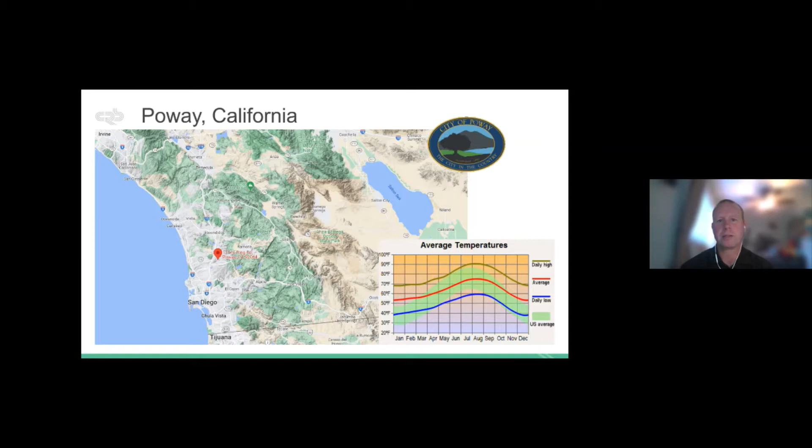So where is Poway? Again, it's a suburb of San Diego. I'm about 20 minutes to the coast. I'm about 25 minutes from downtown San Diego. We do get some cold nights, so no snow or anything, but we do get down into freezing temps, and then we routinely get into triple digits during the summertime. So I offer that just as maybe a benchmark. So when I'm showing you some of my data, family of 5, living a little bit further inland, so it is temperate, but we do get some hot summers and some cool winters.

So last year, I had the opportunity to present Allogene Therapeutics. They were an ATMP manufacturing facility, and they wanted to prioritize 3 items as part of that design, and that was adaptability, collaboration, and sustainability. And for them, sustainability was inclusive of a zero carbon design. So as part of that Allogene effort, we went ahead and developed this 4-step process. And I've applied this 4-step process to many other facilities as well as my own home. And so I'm going to take you through those 4 steps and what I was able to do here at my home level. So step 1 was applying that best design and construction practice.

So anybody that's purchased a home knows that there's a binder filled with just a lot of information. And as the broker is going through flipping pages, do you understand this? Do you understand this? They flipped over one that said energy efficiency mortgage, which caught my attention. Asked a little bit more about it. The broker said, oh, no one takes advantage of this. I said, well, it's something that I think I might want to. So let me know a little bit more about this.

Put on by the Housing and Urban Development, or HUD, where they can finance 5% of the home purchase price or $8,000, whichever is less, to give you money through your escrow account for doing energy efficiency upgrades. And that $8,000 maybe translates to $50 mortgage, and there's no pre-approvals needed because the thought process is that additional mortgage that you'd be paying is roughly equivalent to the energy savings. So the first step on part of this program is to acquire a HERS, a home energy rating system, effectively an energy audit, where they tell you where to put your money.

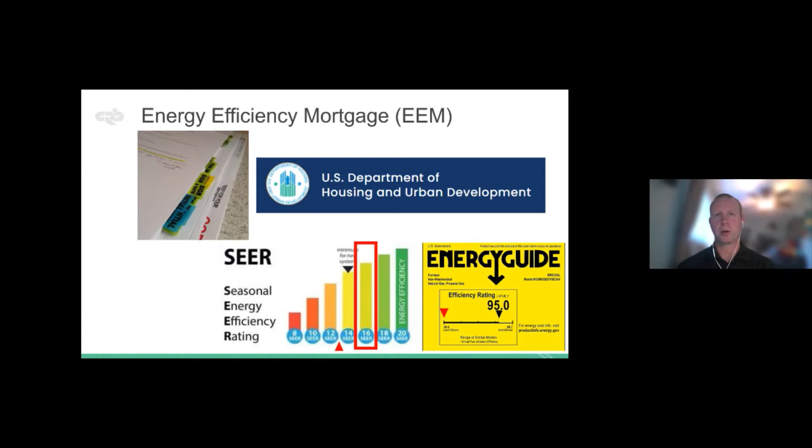What I was also able to do as part of that same program was enhance the envelope. So I replaced all of my windows with dual pane, low E, argon filled glass. So not only does it have the thermal properties, but it also has the acoustics. So being able to drown out some of the noise from the backyard, or some of the jets that fly overhead, because I am in proximity to the previous Top Gun facility.

And then also, my house was built in 1972. It's 50 years old. There was no sidewall insulation, so we went ahead and updated all the insulation in the walls with loose cellulose, and then blown insulation in the attic as well, so equivalent of R13, R19 respectively.

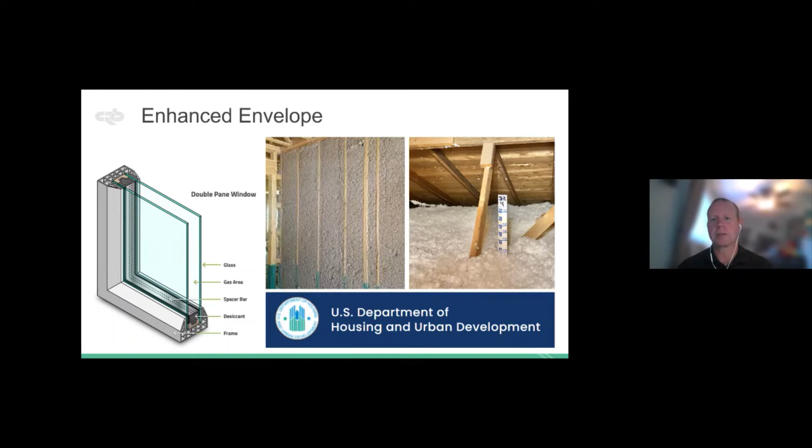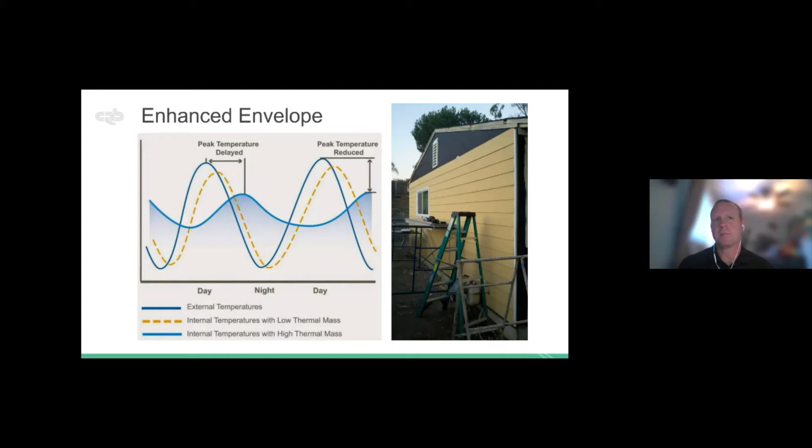The other first upgrade that I did to the house was I rewrapped the entire skin in Hardie plank siding, so it's a cementitious material. And what this cement or even stucco type product allows you to do is add additional thermal mass, which might not be a great insulator, but is a great capacitor. So it smooths out some of the peaks and valleys. So while the temperature outside might peak at 1 o'clock in the afternoon, my house doesn't see that highest temperature until maybe 4 or 5 o'clock in the evening.

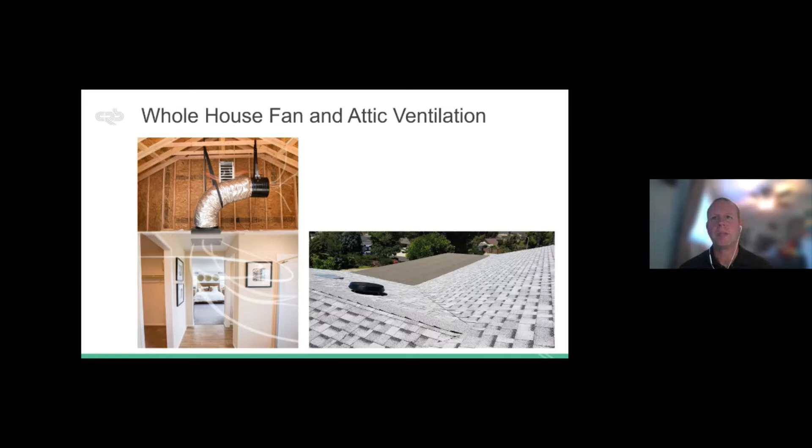What I was also able to do on my lighting, as part of my roofing project that I did over COVID, was install some Solatubes. So I put one in each restroom that are in the core. They don't have proximity to the exterior windows. And then also in the hallway. And I get enough light that I rarely turn on the lights in either the hallway or the restroom. And even during the middle of the night, I actually get enough moonlight that comes through that I can walk freely to get a drink of water in the middle of the night.

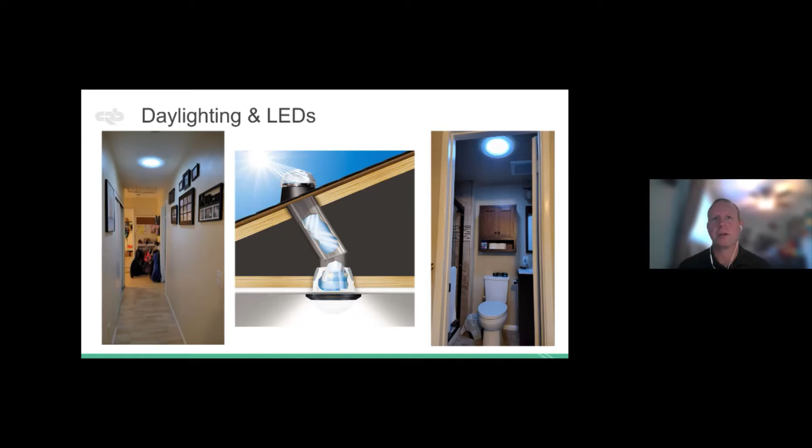Since we've been in lockdown for a while, I think everyone had a COVID project. My COVID project was this front porch. So as part of that roofing project, I extended the front porch out and got some additional shade on that southern exposure. I went ahead and put in some ceiling fans so I could use that during the summertime heat. I also put in an electric radiant heater so I could use that in the cool mornings. And it's really just put a lot of shade onto the exterior of the skin.

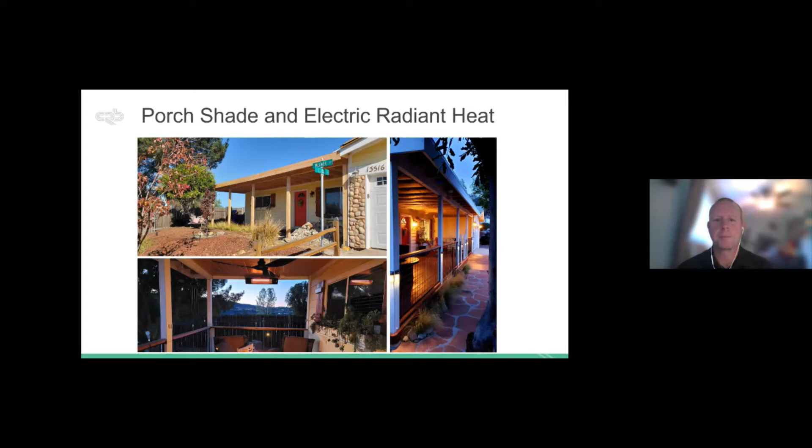And not only does that save 100,000 gallons of water a year, which translates to nearly $1,000 that would be coming out of my pocket, but it also translates to the additional cost of maintaining grass, the mowing, the trimming, the edging, the fertilizing, and probably most importantly to me is the time commitment. We're a pretty active family, and committing every Saturday morning to mowing the lawn is something that I wasn't excited about doing. So this has been a great way for us to spend more time with the family.

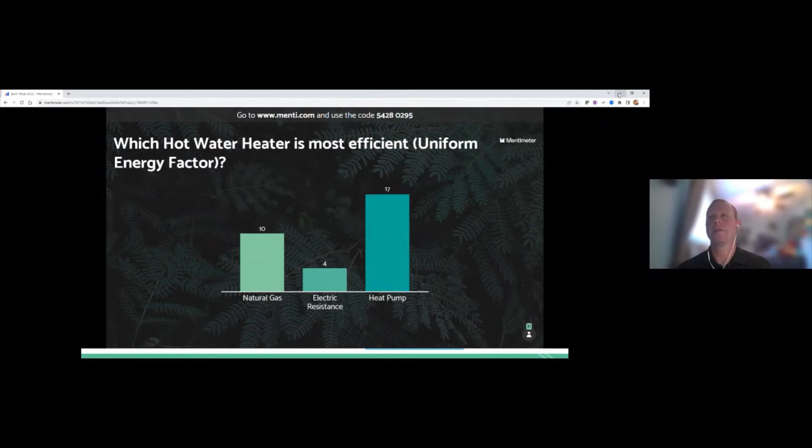But as those continue to populate, you can see that there's a lot of heat pumps, there's quite a few natural gas, and then electric resistance rounding out the last. So I'm going to flip back over. There's still a couple more natural gas that are edging their way up. All right, so let me flip back over and show the results.

So according to the uniform energy factor as published by the manufacturer, you can see that a heat pump has a tremendous energy advantage, almost to the magnitude of 4 times the efficiency of electric resistance and 6 times the efficiency of natural gas. It's incredibly more efficient. There are some drawbacks. It's a low grade heat, so it takes a lot of time. So you're relying on all of your storage capacity in order to maintain that heat.

I had an emergency where I discovered that I had a leak in my water heater, but I luckily had a plan in place and already had a water heater picked out. So this is my water heater on the left. It's a heat pump water heater. It's effectively a small air conditioner that sits on the top, and it rejects cold air to the house and then puts the heat into the water.

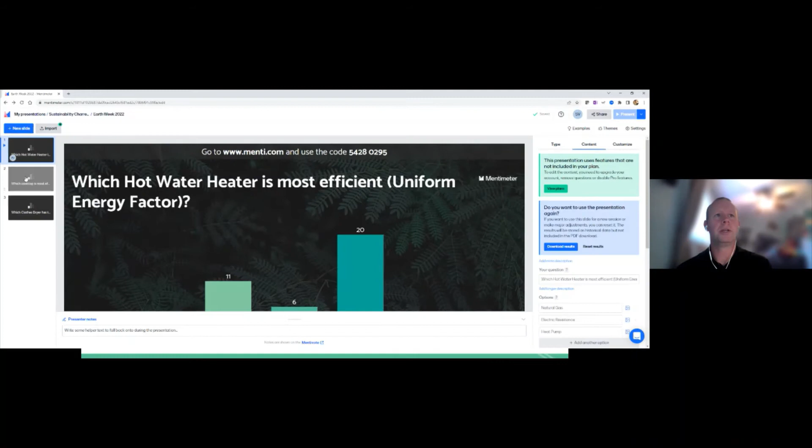So during the summertime, if you want to know the coldest place in my house, go into the laundry room adjacent to this water heater and just stand in front of that nice fan, and you'll have nice 50-degree air being blown on you. So that's going to bring us to the next question, and I'm going to flip back over and see if I can get this to work. But this question is going to be with respect towards which cooktop is most efficient? Which is fastest to boil a cup or a pot of water? Natural gas, electric resistance, or induction?

And so I'm trying to do this on my own phone to see that it's working. And it does look like some comments are coming through. But yeah, if you do log into menti.com, use the code 54280295, you can see some of the results start to populate. So it looks like it is working properly.

So I'll tell you, this was one of the more difficult selling features at my house. My wife is a prideful cook. She doesn't like people messing with her equipment. She knows that I was on my electrification quest, so there was a lot of hesitation, and I will flip over back to the slide. So it looks like there's an overwhelming opinion of induction. So let's flip back over.

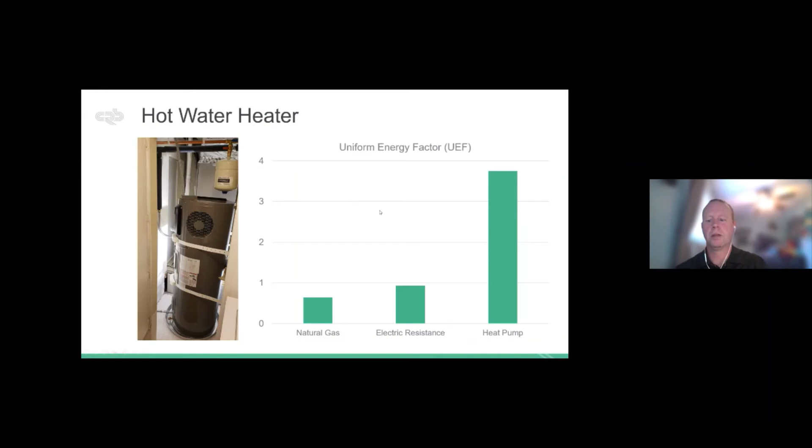This is actually my stove on the left-hand side. It includes an air fryer. So I said, hey, Amy, give me your honest opinion. It's been 2 months. What do you think? And her feedback was, I love it. So really the only challenge is that you need to make sure that you have metal clad cookware, because it is running off magnets. But from an efficiency standpoint, induction is by far the superior one there.

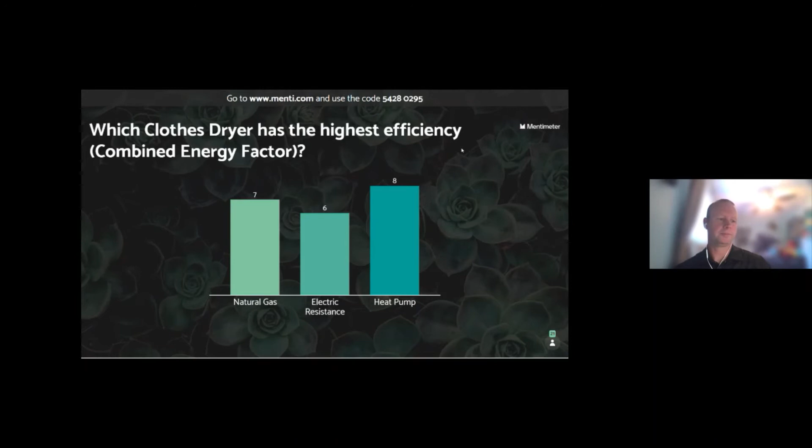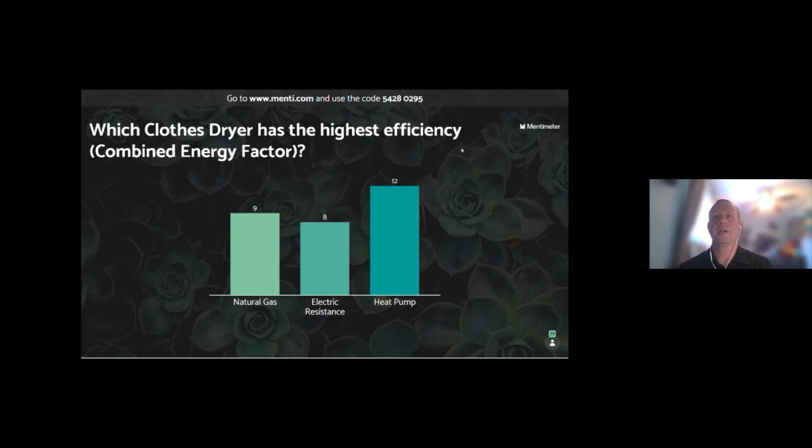So this is going to be my last question, and it's going to be which clothes dryer. So let me flip back over. And the question is, which clothes dryer technology is the highest efficiency according to its combined energy factor? Natural gas, electric resistance, or heat pump? This one's a little bit more evenly spread. I'll give that just a few more seconds to populate. But it looks like it's pretty evenly balanced there. And maybe because people know that it's not a trick question, but there's a little bit more difference of opinion on this one.

So the vertical axis is the efficiency, and you can see that there are a lot of heat pumps that are most efficient, that they are higher on the efficiency curve on the vertical axis, while there are some that are below the gas dryer. But what you'll also notice is because heat pumps are notoriously low-grade heat, the cycle times are much, much longer. Now, that's not always necessarily a bad thing because it is more gentle on the clothing, but most people want to get their drying done within 60 minutes time or so.

So the other drawbacks with heat pumps is that they do have a little bit more maintenance. There's condensate that comes off of that, so you need to figure out a way to drain it or to pump it out. And there's also multiple coils. There's effectively a hot coil and a cold coil that needs to be maintained every so often. So I opted not to go the heat pump route because I did not want this electrification quest to backfire on me. So I took the efficiency penalty and went with an electric resistance dryer, and we're going to see some of the results of that coming up.

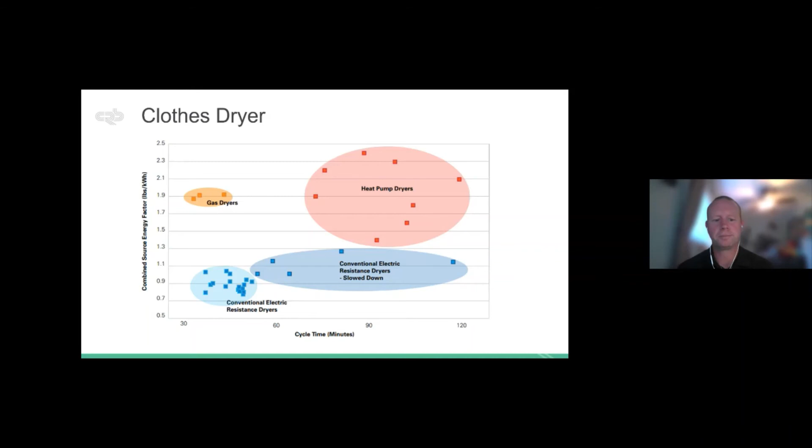So electrification, what has that effectively done for me? Well, it's lowered my gas usage, and that's no surprise. So you can see as I've started to convert these different appliances, my gas is trending down towards zero. So those last 4 or 5 years, and you can see that it peaks in the wintertime, of course, when we're heating up the house, and then it settles down when we're still operating those base loads.

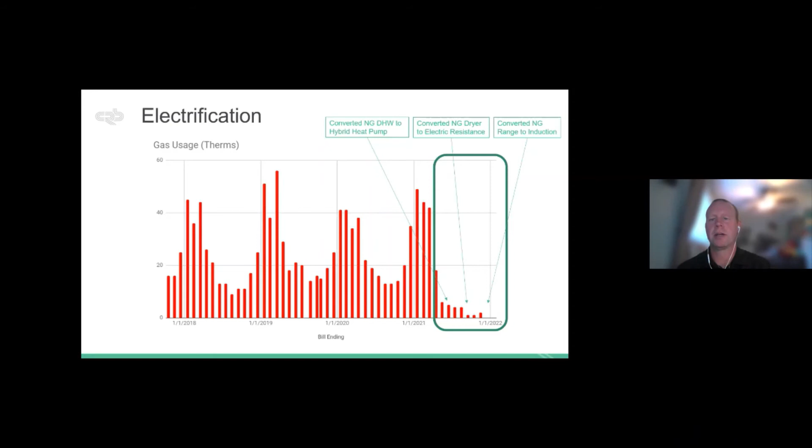So let's move on to step 3, resiliency and self-reliancy. Provide on-site renewable power with time of use energy storage strategies. The on-site renewable is pretty straightforward. The time of use energy strategies is where I think there's a lot of conversations that we can have going forward. This is my solar system. It's an 8 kW. I had the luxury of knowing what my base load was, looking at my last bills, and then estimating what I was going to be growing into.

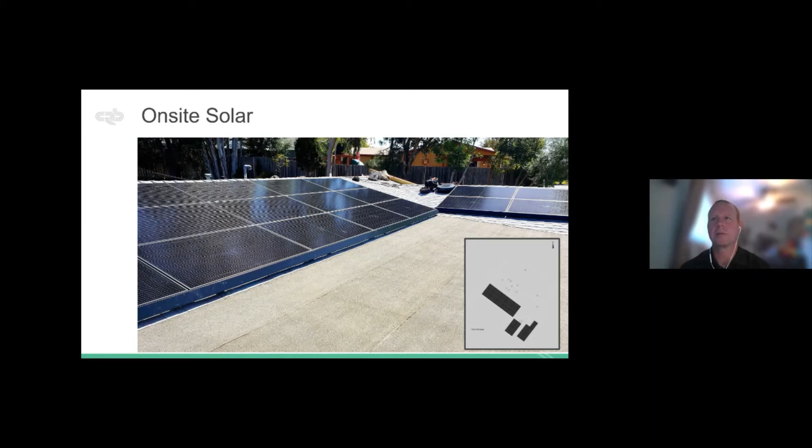So here's my 8 kW system. It produces about 12,000 kWh annually. If you do some simple math, that's about 1,600 kWh per kW. It's 24 panels, 340 watts. It's a Tesla array. And so far it's been great. It's performed well, and you can see when I flipped the switch, I was backfeeding the grid as a net average for those first couple months.

And then as we moved into winter, you can see that I was getting much less production. To the amount, about 50% of my peak is my winter time. So moving into winter, there's less production, and therefore it starts to go back positive. How does that translate to cost? Well, pretty good. So you can see my bill for the end of 2021 was effectively zero once that solar was installed. Not to mention that's including electrifying 3 out of 4 appliances.

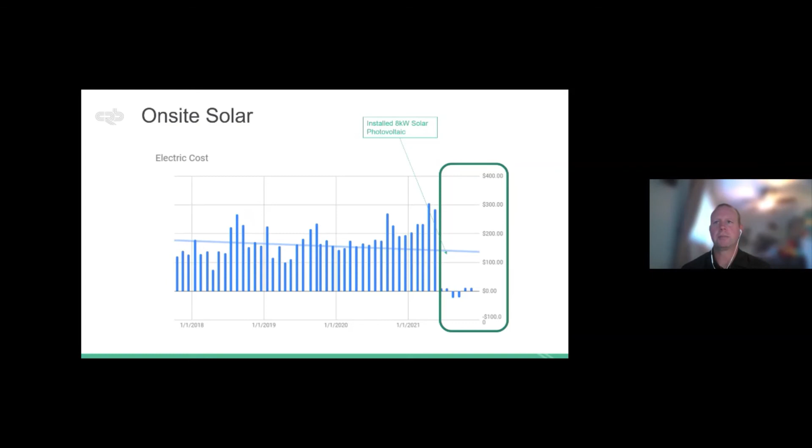So that's a pretty great thing. When we talk about on-site storage, that's where I did not opt to go into getting a battery. It's about a $10,000 add, and the return on investment for me was just a little too long. And I was hopeful that in the future I might have a truck.

And I know that was asked about in yesterday's presentation as far as whether or not we're considering. And right now, there's still a lot of supply chain issues with a lot of the EV truck market. So I'm pretty hopeful that that will get worked out over the next 2 years. And then, of course, the infrastructure is improving daily.

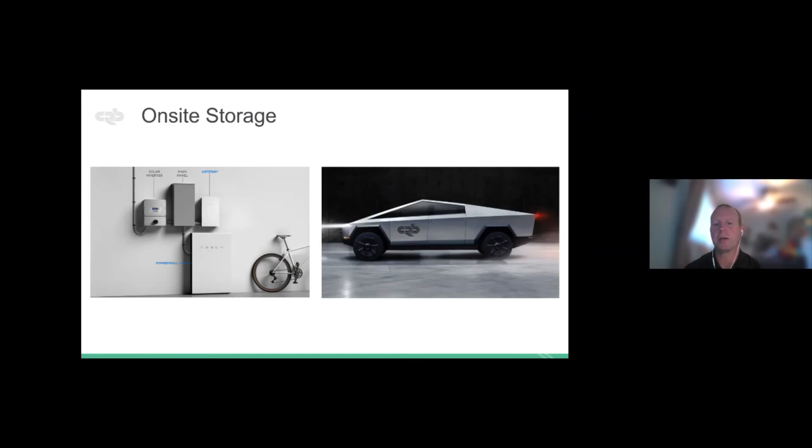So I'm looking forward to having my vehicle that would hopefully have that bidirectional flow of electricity, both V2G, vehicle to grid, and vehicle to load, V2L. So I can charge it when I'm overproducing, and then I can discharge the battery when I need to.

Other strategies that you can do for time of use energy. So on the lower left, you're going to see that the utilities are smart. They know that their profits are being challenged with on-site renewables. So they've started to put peak pricing from the hours of 4 to 9 p.m. when the demand stays high and the supply drops off when the solar goes down.

So some things that you can do, I already mentioned the cementitious siding. So again, that was kind of just creating more thermal mass as part of the house. But you can also pre-cool your house. So run the air conditioning from 2 to 4 p.m. and then close up all the windows and try to drift through that evening time period. You can apply these same practices to some of our facility design by making the chilled water temperature colder as an example.

Same thing with my hot water heater. On the far right, you can see my schedule at 12 o'clock. I crank that hot water heater up to 131 degrees. So that gives me a little bit extra capacity that I can try to ride out through the evening period. And you can see in that example there that I was able to avoid the use of the water heater from the hours of 4 to 9.

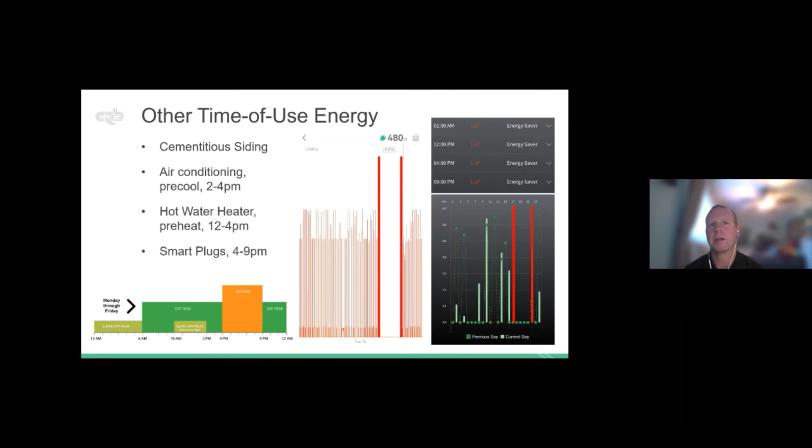You can also use smart plugs, which the center graphic shows the beer fridge that I have. And again, from 4 to 9, it's 0 because I've programmed the smart plug to turn off during that time frame.

And so this last step is consume 100% renewable grid electricity. I think this is the tried and true argument that just because you electrify does not make it clean necessarily. So if you are connected to a coal-based power plant, that is bad. That is not clean electricity.

So as the utilities have discovered that it's taking more and more money to maintain these old fossil-based power plants, they're getting out of the generation business and leaving that to private sector. And so as private sector is putting more and more renewables online to comply with the state requirements, the customers now have a choice of where they want to buy their generation from. They're still going to use the wires and transmission and billing mechanism of the utility, but they have that choice.

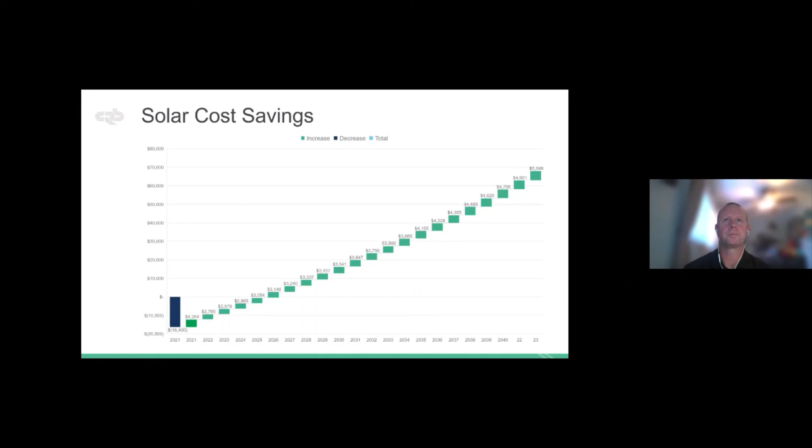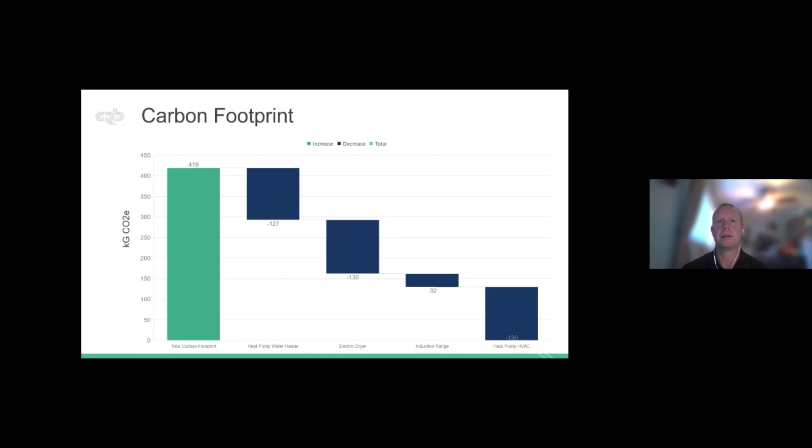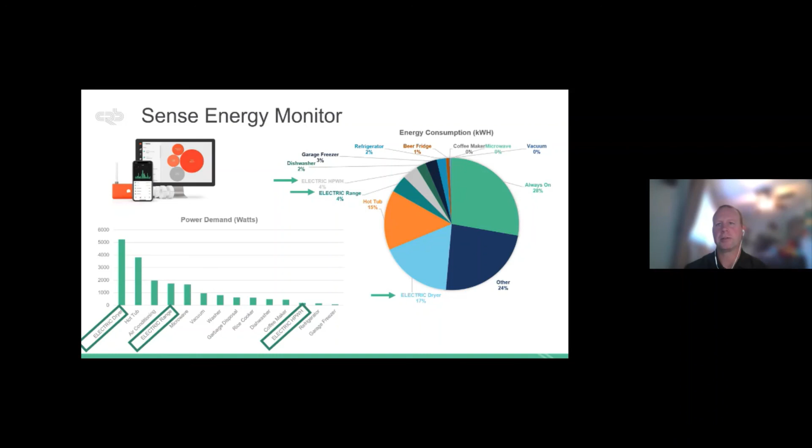Looking over at the pie chart, starting from the top and working around clockwise, you'll see that there's a lot of always on and other, which are still things that are either learning or I need to investigate further. But my biggest appliance is that electric dryer. That was previously at about 20%. We've got it down to 17 because we were heating the kids' towels when they got out of the shower. So that's something that we're not doing any longer; we're going to put a towel rack in instead. But the electric range and electric water heater, those are really relatively small. So again, just knowing where your energy is going allows you to make more intelligent choices.

And then focus on that greatest return on investment. I can't stress enough that the Energy Efficiency Mortgage is a great program. That HERS test is very insightful, aka an energy audit. And then anything associated with a heat pump is going to be very efficient and give you your best ROI. And if you can take advantage of the investment tax credit, they've extended it to 2023. So currently you've got a 26% kickback, and next year that will fall off to 22 before it falls off drastically. So if you can take advantage of solar PV, the next 2 years is the time to do it.